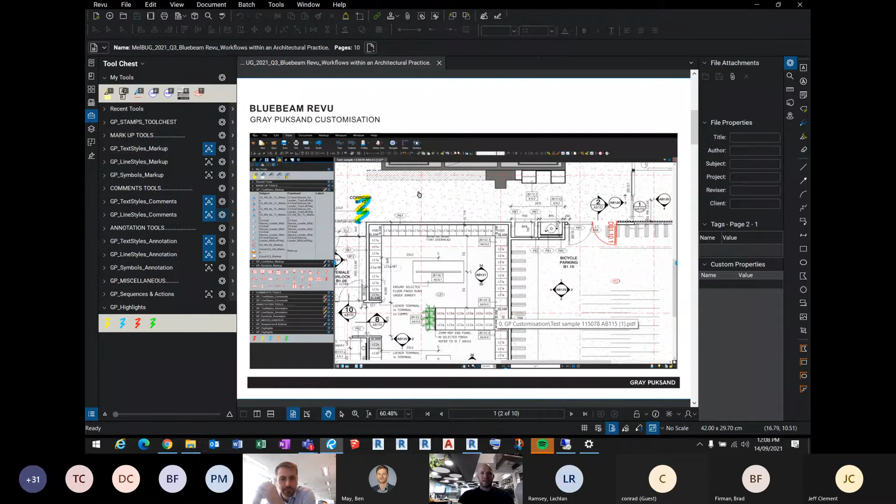So here we might have a particular drawing that's gone out and a project leader may want to mark this up electronically. The ability to mark it up electronically means people can be more agile and more collaborative, and also means less paper needs to be printed, which is better for the environment too. We have a series of markup tools we've created around text styles and symbols as well. So every symbol we've created in Revit has an element in Bluebeam as well.

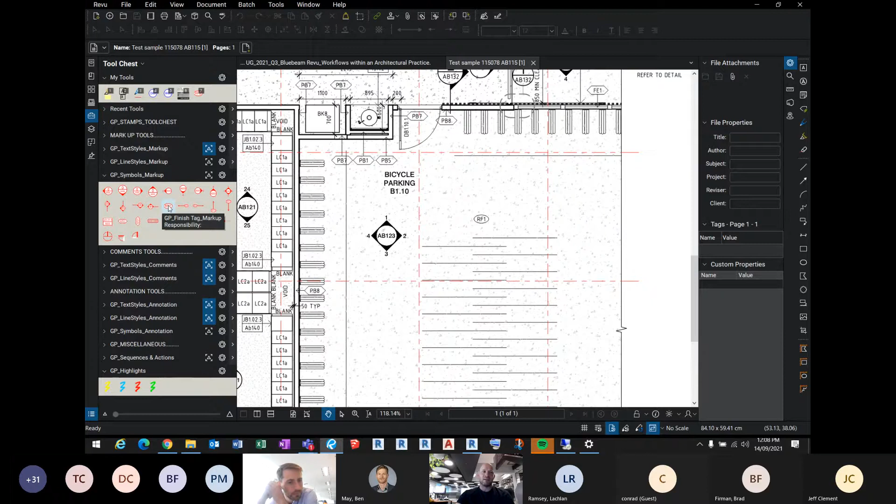So someone can quickly just drag it on and drop it. If a finish isn't quite correct, they can drag it on and mark up the finish they want it to be. So these are all interactive as well.

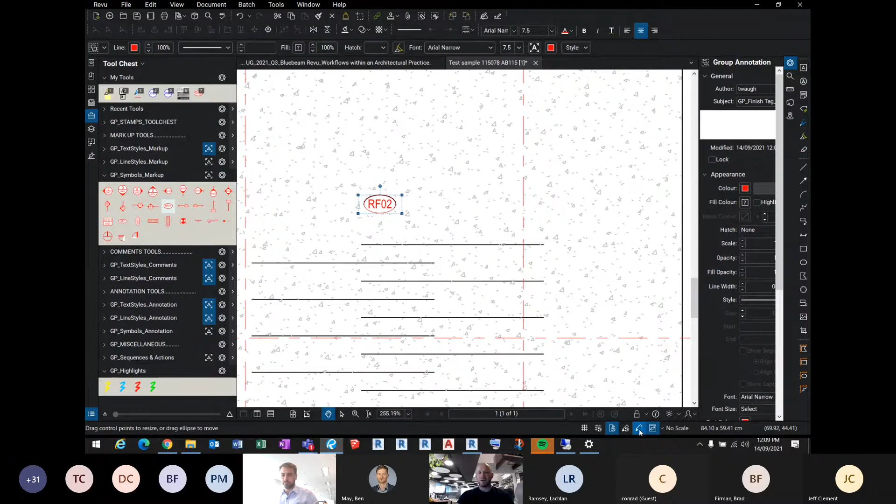In relation to that, if you've got a markup tool you're using quite a bit, there are a couple of ways you can reuse that. The reuse markup tool down here is quite a handy way to reuse a markup, and it lets you move markups around quite easily and repeat them.

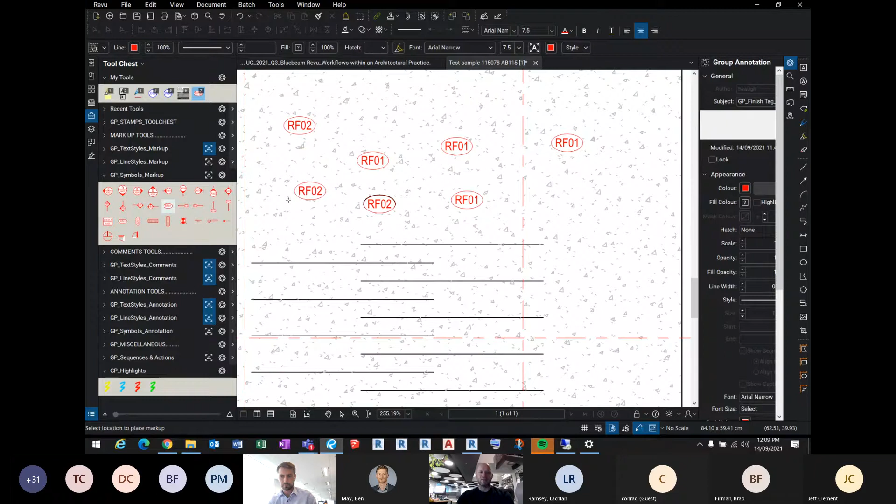You've also got an option up here of adding something to the tool chest. If you right click on an element and add it to the tool chest, you can add that to My Tools. Once you add that to My Tools, it gives you a little number keystroke, so on the keyboard if you just keep repeating 7, that'll allow you to reuse that markup.

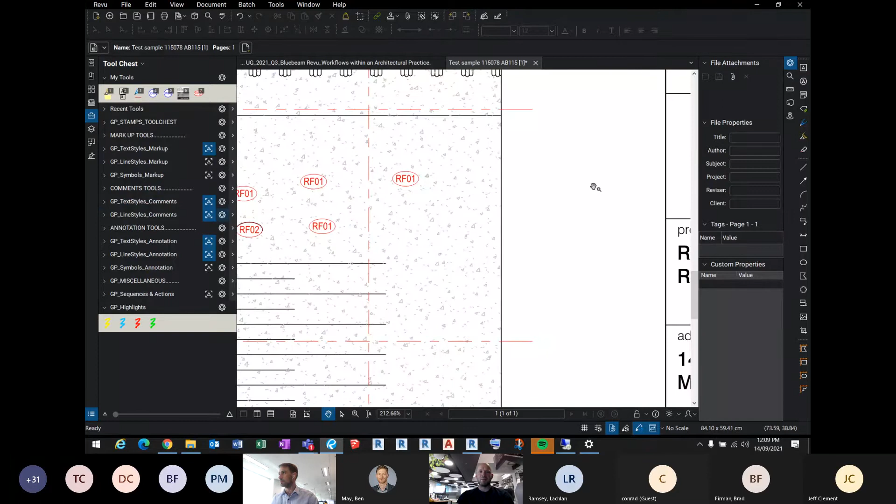We've got a series of options here around text styles, line styles, and symbols. These are all red markups - a red markup is something that definitely goes onto a drawing in the document and needs to complete it. These ones around comments are blue - a blue is more a direction. In the past, if everything was marked up in red, sometimes a direction could end up on a drawing, so we created the workflow that if a text style is blue, it won't go on the drawing - it's more a direction. Then we've got annotation tools where symbols and things are in black as well.

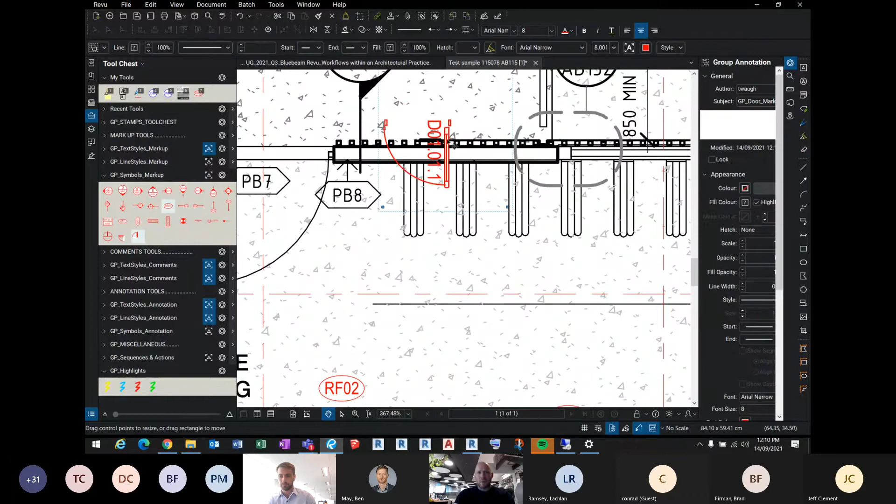We've also created elements around doors, so you can grab doors and drag them on here. We've got a masking element for that door, and then you can flip those doors as well and resize them. So someone like a project leader who's quickly wanting to mark up maybe a double door in this location can quickly put a door there for a markup.

We've also got a lot of things around elevation tags as well. So if someone wants a direction for an elevation tag to be in a certain location, they can show those elevation tags as well.

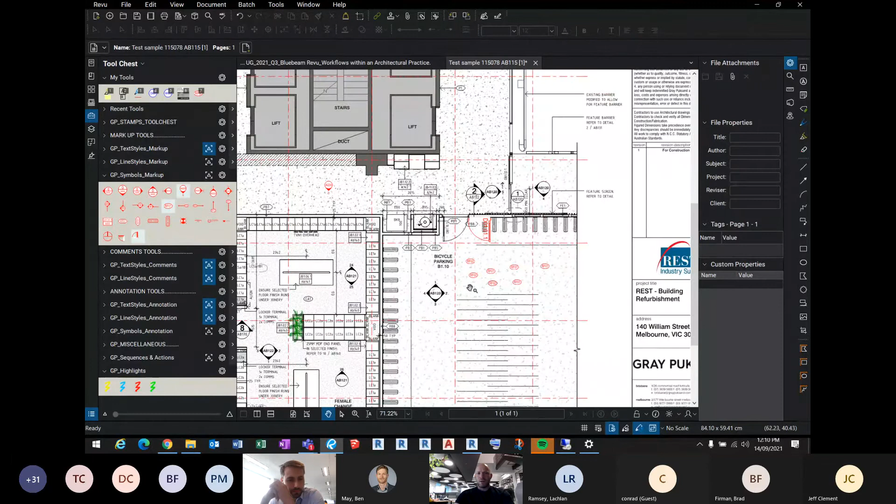The classic markup would usually have a highlighter to show that something's been done. We've got a quick little tool here where you can actually just highlight something's been done. This is quite valuable if someone's sick one day, so people can understand where others are at with those particular markups by going through and marking up those tools.

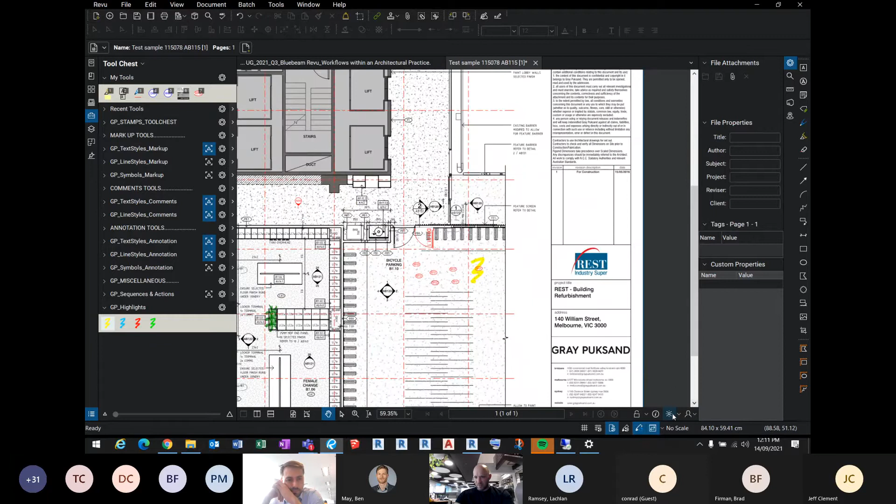Another handy element that people are not always aware of is the dimmer tool. The dimmer tool function basically puts everything in the background that's part of the printed PDF and just shows up the markup tools. It's quite a handy tool to see what's been marked up on a particular drawing set.

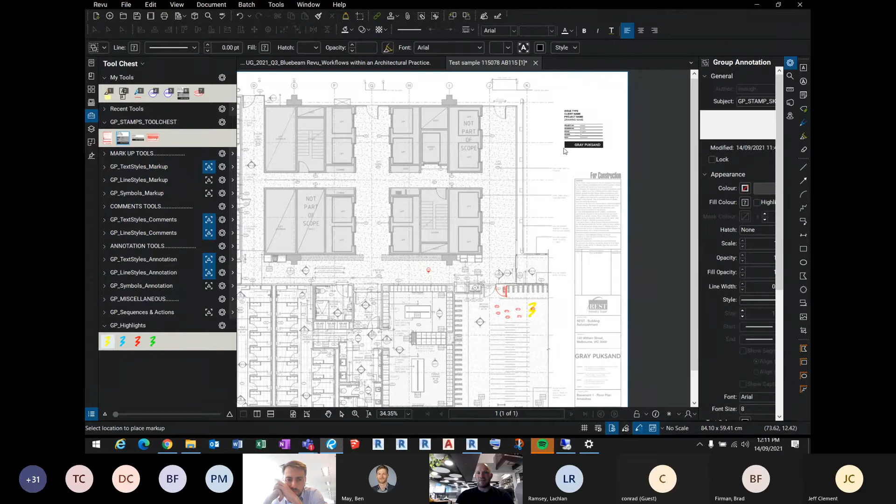We've also got what we refer to as our GP stamps. These are interactive as well. So if you're doing a little sketch, you might just pop in a little title block on a blank sheet, and since these are all interactive, you can describe what they are in relation to full information and start to fill out particular sets of documentation for little sketches.

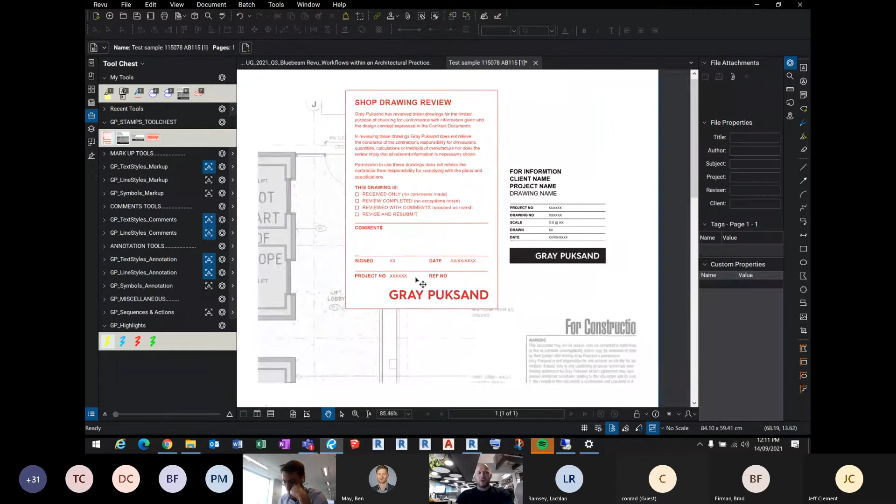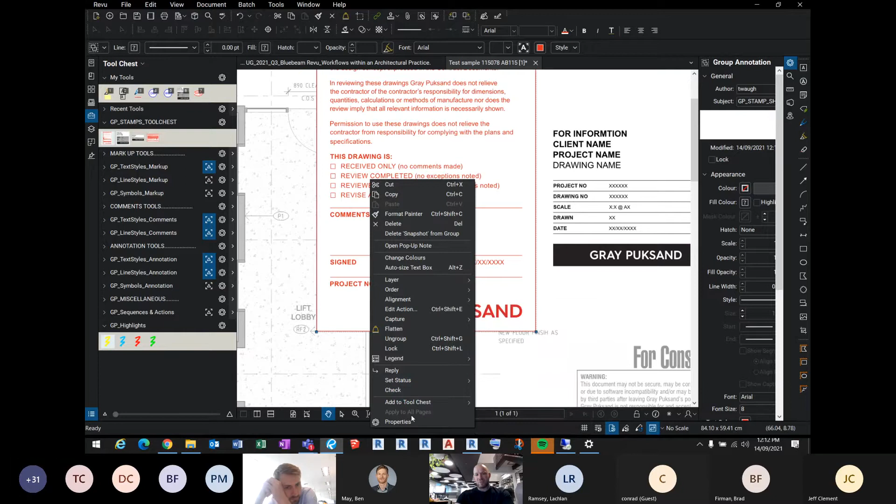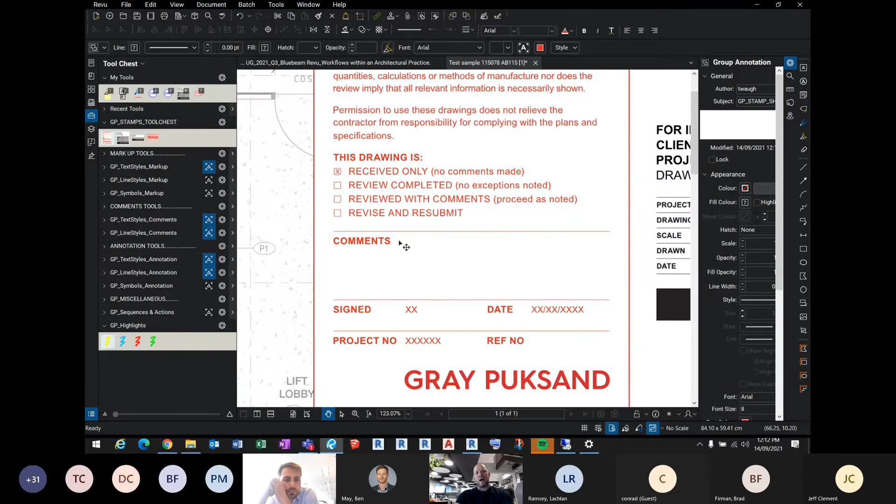We've also got shop drawing stamps as well. So what I recommend to people is to fill out things like the signature and the project number. Then you can also apply it to multiple pages. So if you had multiple sheets, you can quickly apply that to multiple sheets, and then simply click on those sheets. These are interactive, and you can actually start placing the individual sheet markups on those individual sheets.

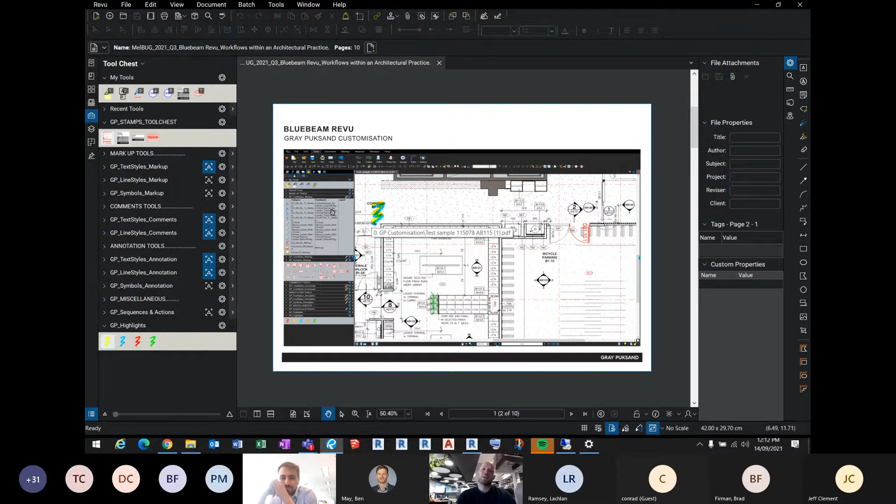So that's really a nice workflow around the tool chest. We spent a lot of time with Chinook, who helped us work through this with the previous distributor, and it's saved a lot of time for our users in relation to markups, being agile, and using less paper.

The next one that we use a lot is Bluebeam Studio. Now, I believe you've gone through a lot of sessions previously on Bluebeam Studio, so I won't go into that. But if you haven't explored it, I recommend you do. It's a really valuable collaborative tool. Reach out to your distributor for that.

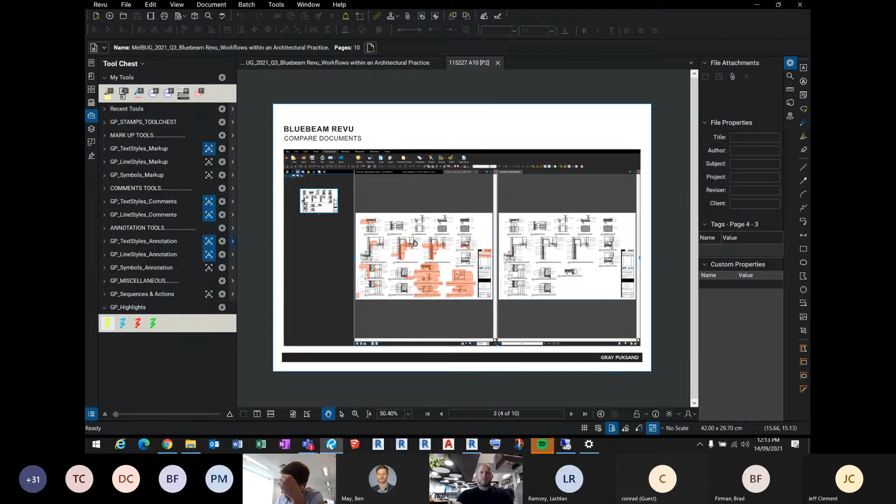Compare documents is quite a handy tool to use. There are a couple of different ways we can compare documents: one is compare, and one is overlay. I'll go through compare documents first. So here we've got a preliminary set of documentation, and we want to see what's changed between preliminary and tender.

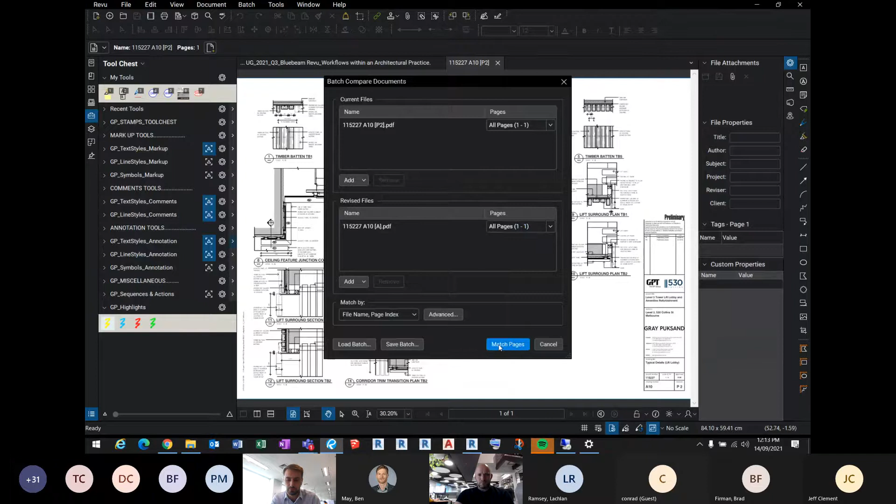So if we go to our batch tools and compare documents, we want to add a document to this. And we want to add another document, so that was the preliminary set, and then we'll add the one which is the tender set. Oh sorry, I went to batch there—I was meant to go to compare documents, this one here, sorry, apologies for that.

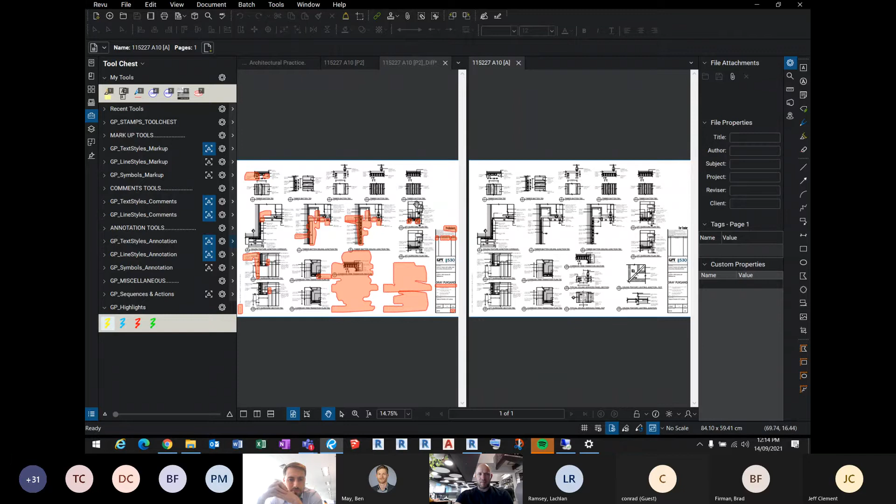And this will create a separate document called diff. You can rename this document if you need to save it in the future. But as you can see, it's bringing them up side by side, and it's showing all the information that's changed—so we've got preliminary, and for tender it's changed.

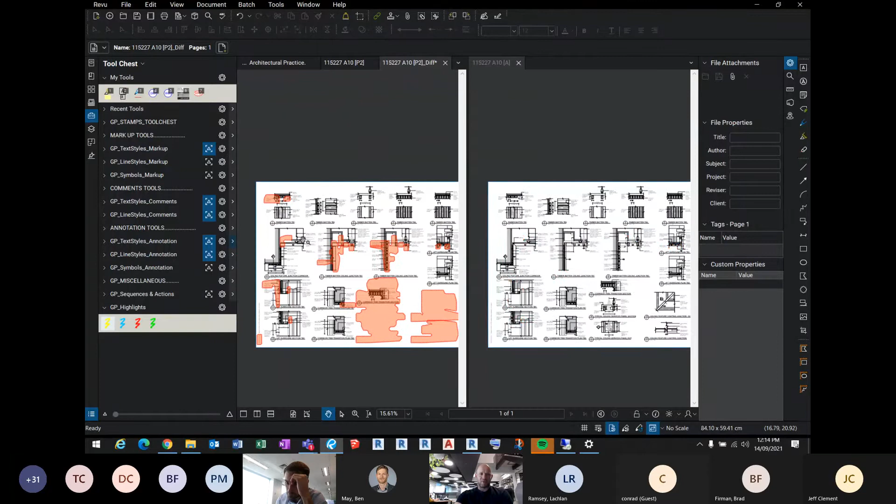We've noticed revisions of changes. As we move forward here, we can see extra detail items have been changed. And as we go up to here, we can see even more detail around the batten size that's changed. Now, this is quite valuable if you needed to send something to a project manager so they can understand what changes have happened quickly and easily, or you might just do it as a project leader to understand what's changed between particular revisions.

Not every one of these clouds is actually going to be required. So if you click on one here, this is just talking about time and date stamps. You can click on the unlock for that one and delete it because it's not relevant.

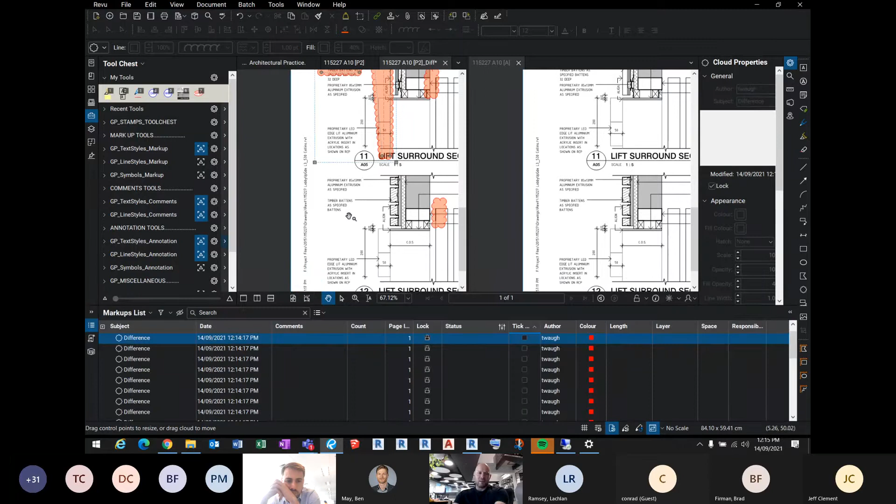You can start looking at adding comments to these as well. So in here, if we unlock this one, we can look at adding a comment about what that change is. So we know that's a batten size change. And then you can see down here, it's adding those comments around the batten size change.

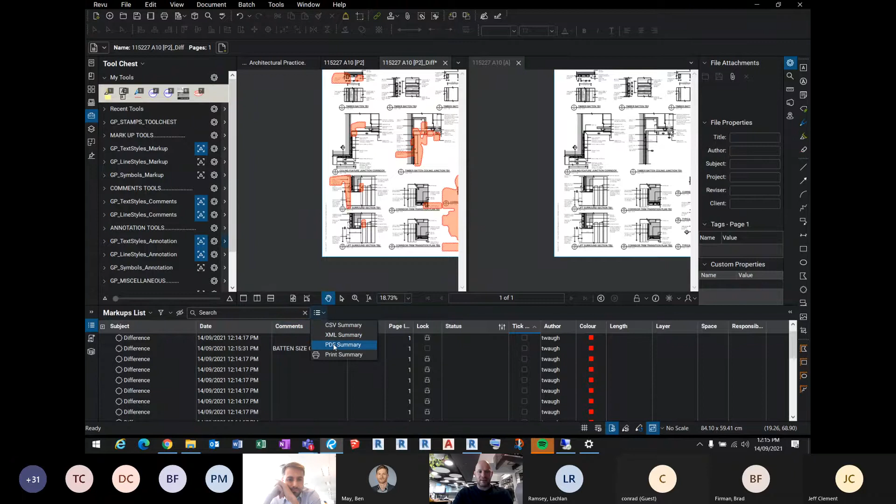Now, the handy thing about this is you can actually create a summary as well. So if the project lead wants to know a summary of changes, this is a quick and easy way to highlight some changes. This will create another document which tables the changes. So it highlights here—I'll just see if I can zoom into that for people. It highlights a little snapshot of it, and then any comments will be directed down the side there.

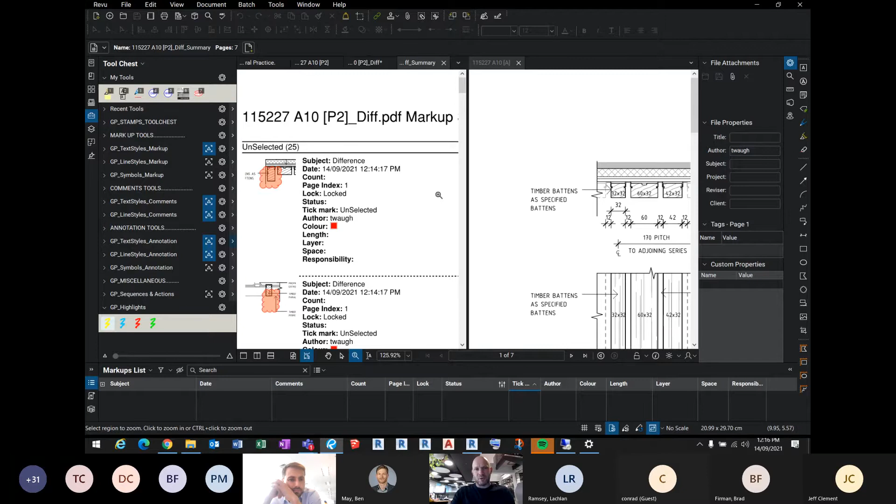So if we go through and look for the one that we changed the comment on, which was the batten change, which is down here, you can see it's literally given us a little snapshot of what that change is, and then we can put in a description of what that change was. So it's a really handy feature to understand some changes.

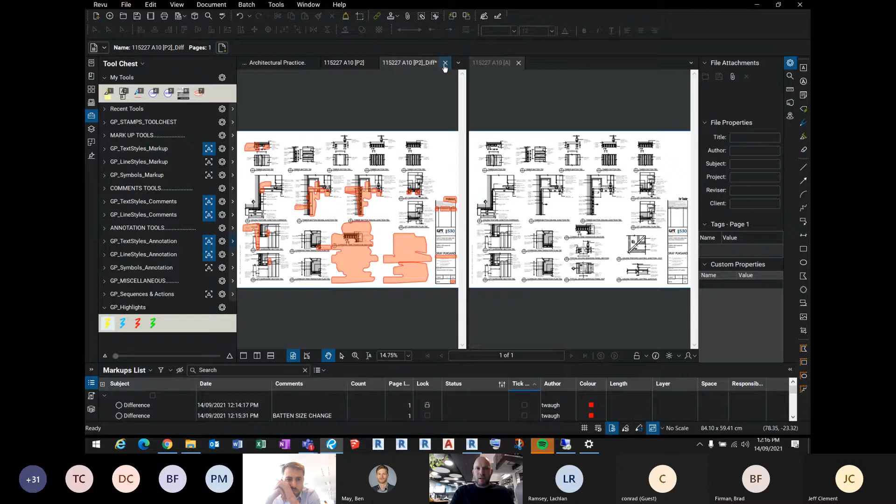The other way to view changes is what's called overlay pages. The overlay pages is more of a graphical representation. So if we go to document and overlay pages this time, it brings up what's automatically open. We can close those and add the ones that we want to review.

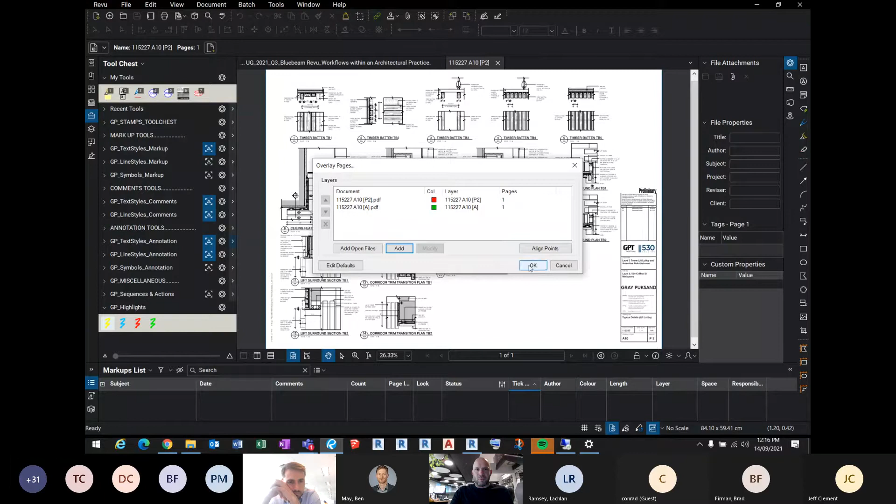Colors can be changed as well, depending on what's required. This is really handy to see what's changed in a graphical representation. If we look back up here, we can see that the green we'd chosen was the tender set, so there's a change to the size of the batten, and here in green there's extra documentation.

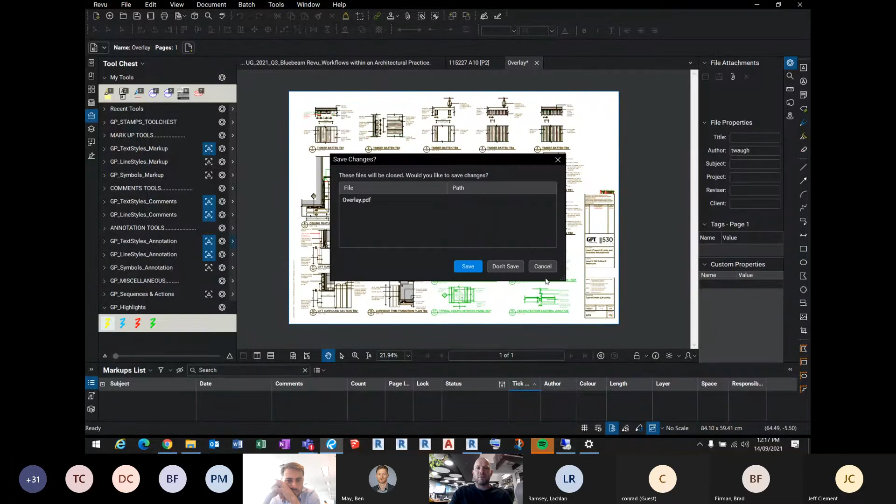This is quite handy for internal reviews, but also for documentation purposes. If we're looking at stairs in this particular case, we had an element of the stair where they hadn't really understood what was happening in this area, because they were looking at the stair in isolation, without the surrounding walls.

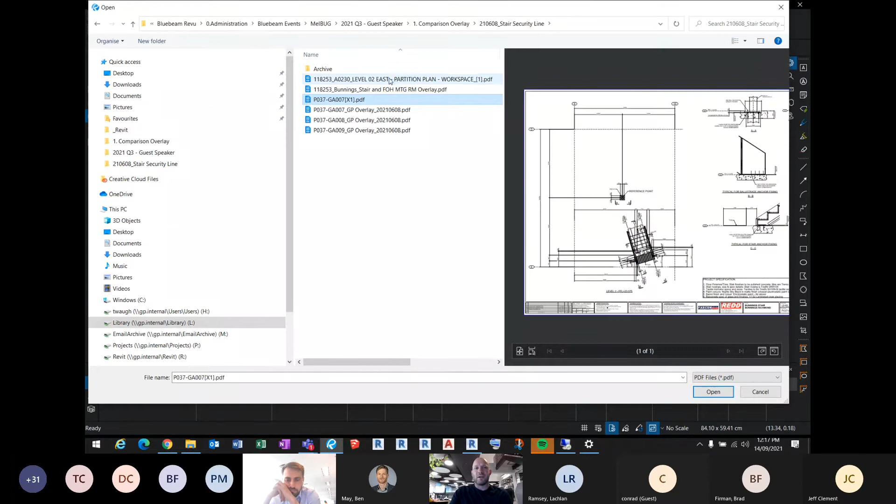So we needed to understand what was going to be the knock-on effect of some of those changes. By doing a little overlay, we could see what needed to be changed.

For overlay pages, you can use what's called align points. If you've got a drawing that's come from a different consultant or a shop drawing, it's not always going to be the same scale, and it's not always going to be in the same location on the page. This is where align points comes in handy.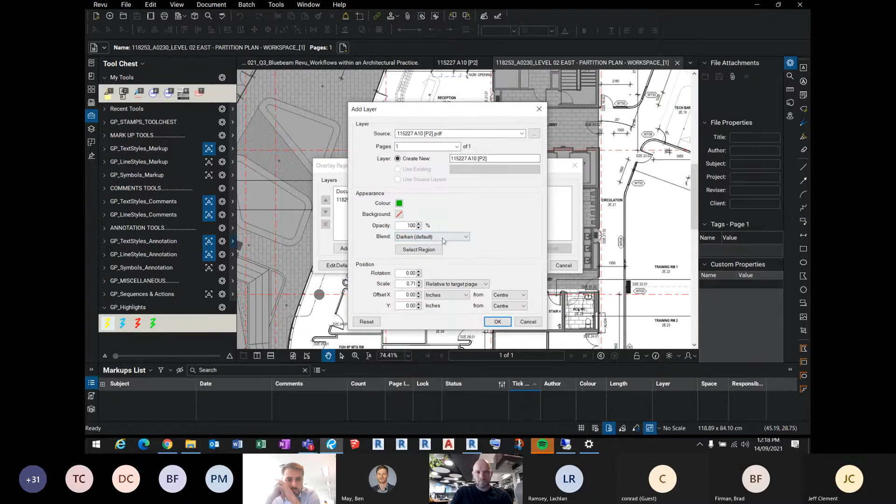With align points, we can choose another layer, and we want to choose that shop drawing. The align points is where we can actually choose something like a grid reference, which will be the same on each of those drawings. It doesn't matter which scale it is, because these three points will actually scale down correctly because we know they're a known dimension.

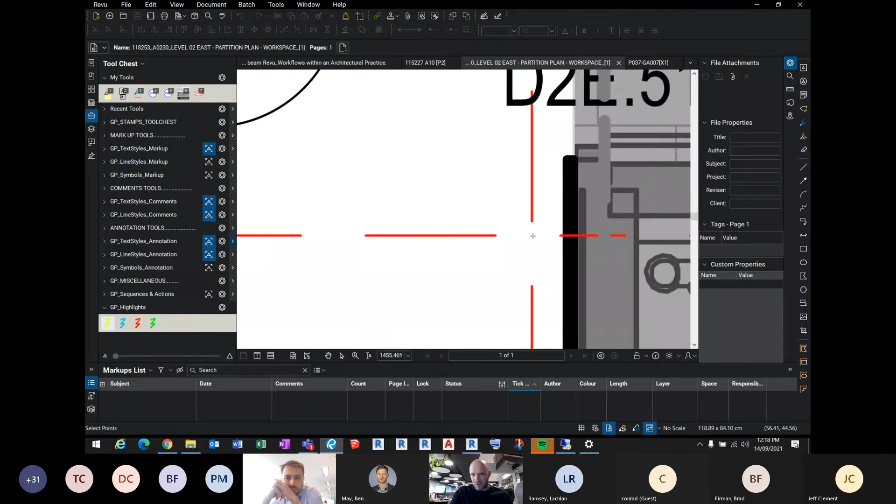So these are the points here from the shop drawing, which are the grid lines. And this will create a separate document which overlays those.

You can see here on this overlay, they'd actually shifted the stair down a little bit and also changed the angle of the stair. That was actually going to cause a clash with our existing walls that we'd created, well, they weren't existing, they hadn't actually been built yet.

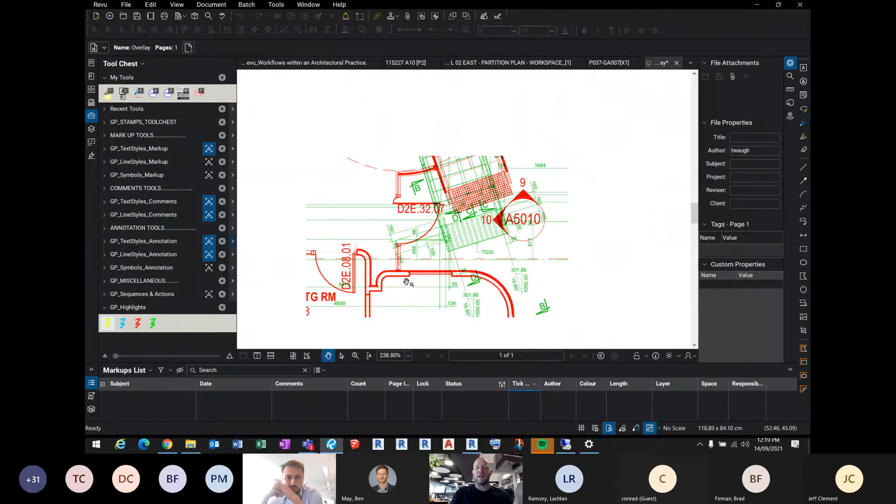But what it allowed us to do is say, well, we might have to look at moving these walls down to allow for this stair to go in that location, if that's the preferred location. You can see here how the overlays worked, where these were different scales. This was quite a large drawing sheet, whereas this was a small drawing sheet. But by using all those grid references, it's actually aligned it quickly and easily.

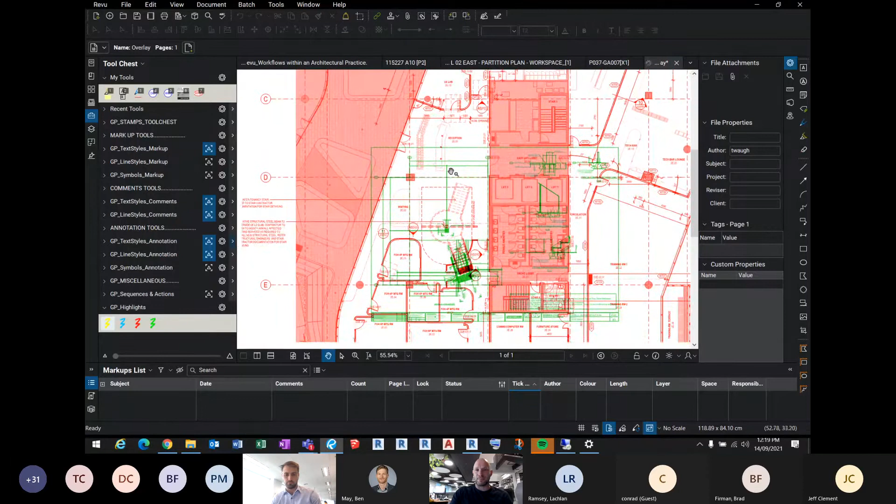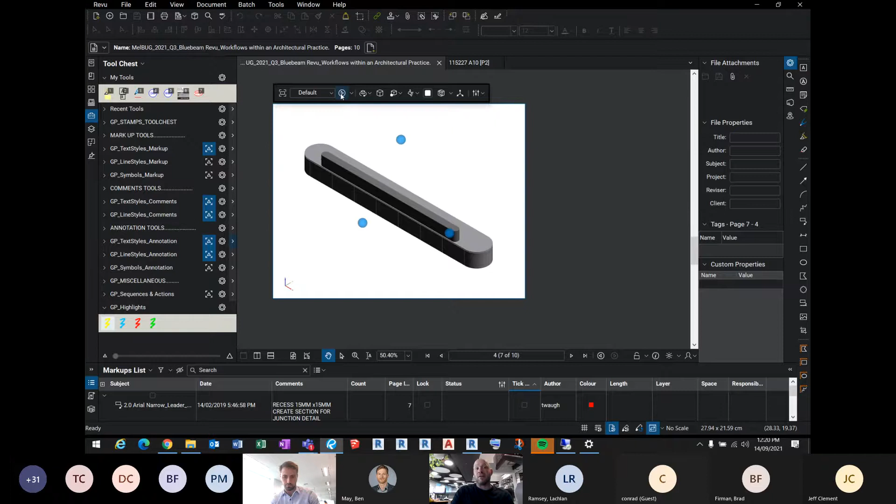Another workflow that's pretty interesting to use is 3D PDFs. If a particular project manager doesn't know how to use Revit or something, they can actually still look at an element in 3D. So here, this is a 3D PDF that's produced through the add-in for Revit and allows you to look at something in three dimensions.

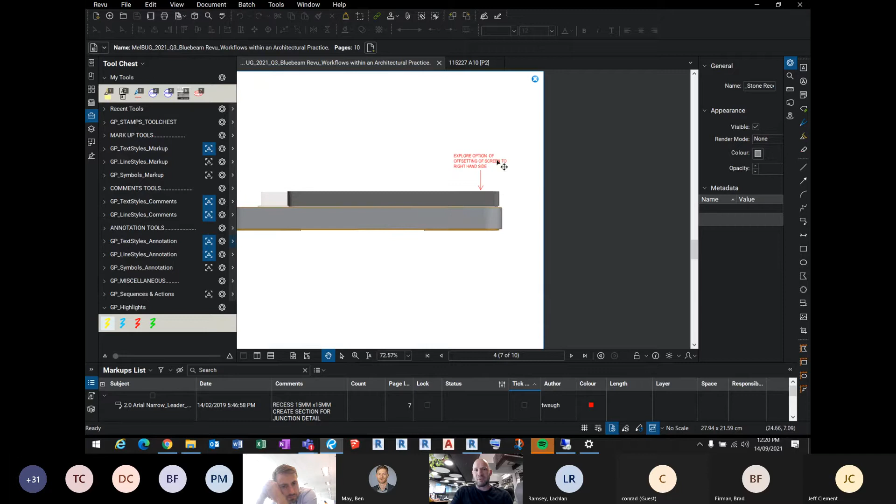It also allows you to look at things like marking up tools and also moving things around. So if we were to explore an option of adjusting this screen to a different location, we can move that, and then we can just add a markup about exploring looking at this screen moving to a different location.

And you can add lots of little details that may need to be added. So they might say, oh, look, let's look at adding a detail around this particular recess and do that as a small scale markup or detail on our drawing set.

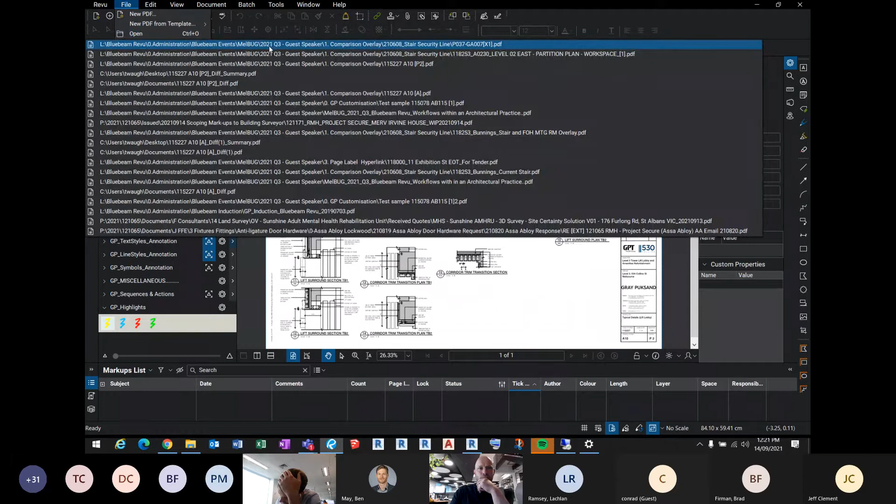I think I'll just go to the next step now, which is talking about page labels. Page labels allows us to quickly and easily navigate through a set of drawings that may not just be ours, but also a consultant set of drawings. The consultant set of drawings may come through as just 1, 2, 3, 4, or our drawings produced straight out of Revit might also do that. So this is where it's quite handy to use the page label feature.

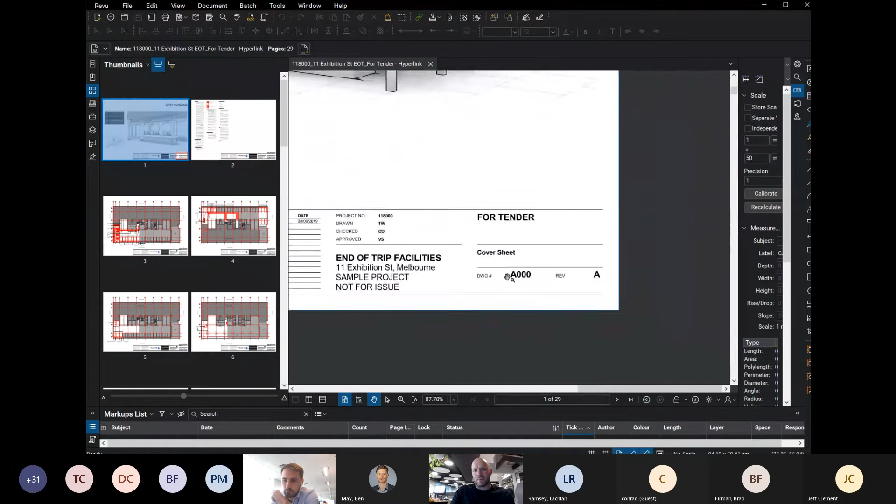So we know that the drawing number is something that we want to reference in this particular case. We go to page labels and we want to select by region, and we just do a little box around the region that we want to select. You can add different elements to this if you wanted to add your project number to your drawing number, for example.

We want the page range to be the complete set. In this case, it's 29 sheets. And you can see down here, this is 1, 2, 3, 4, 5, 6. If we go OK to that, it'll start to populate these so that we can easily navigate what they are by the sheet number.

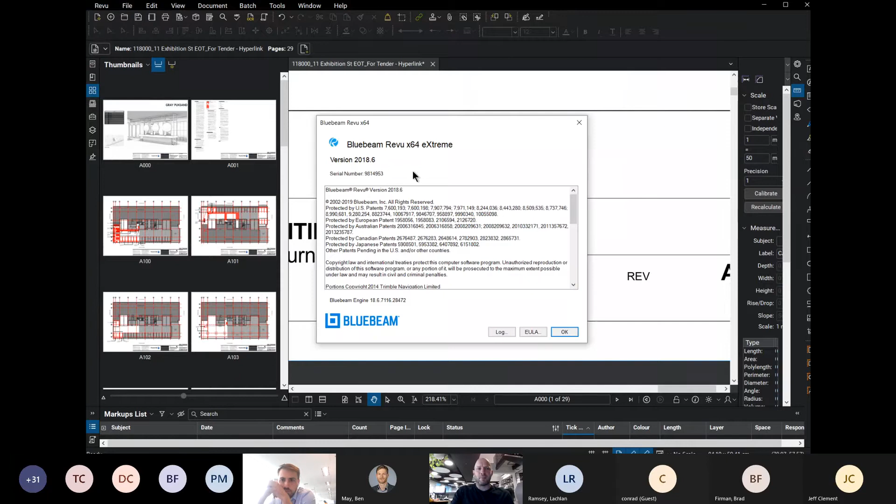The next step to that is what's called batch hyperlinking. With batch hyperlinking, it's only going to be available with an Extreme. We have a couple of versions of Extreme on Hotdesk that allow us to use this feature.

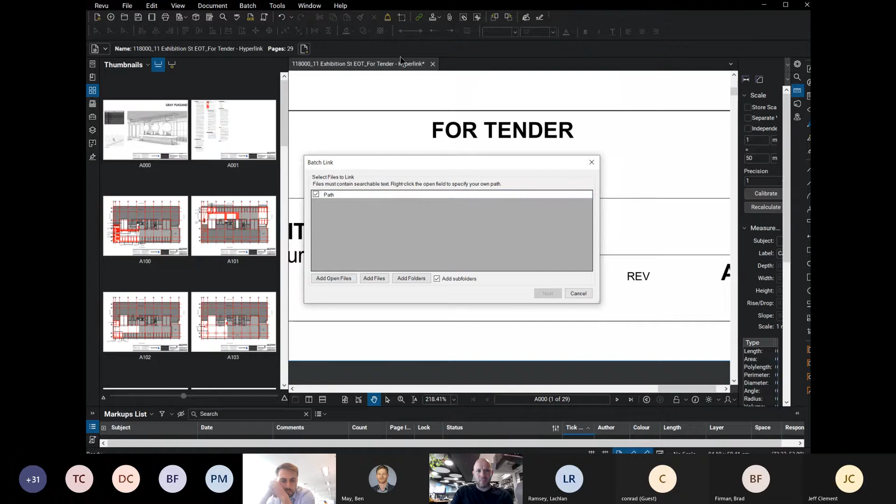So this is where we use the batch linking tool, and we'll go a new batch, and we want to add the open file in this particular case. And we want to start to generate those hyperlinks based on page label.

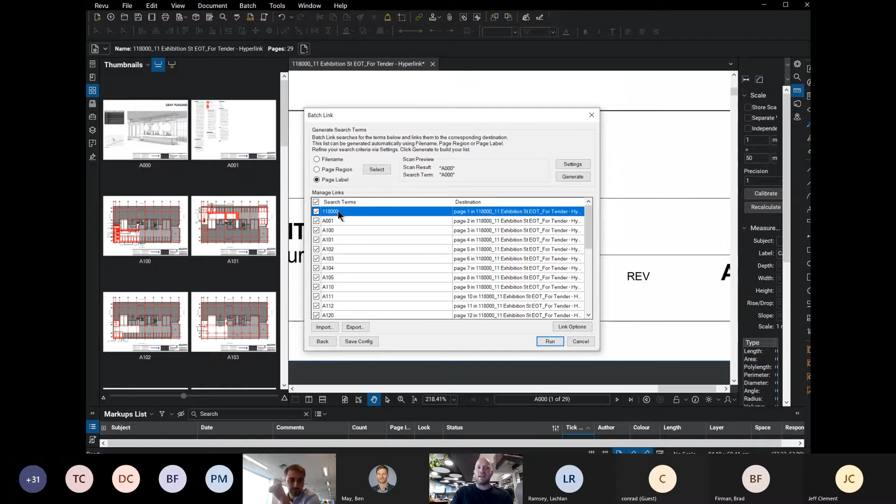One little trick we do also is, because you're never really going to want to link straight to the A000 sheet, what we do is actually use a link that will link the project number back to the A000 sheet. Because the project number is going to be on all the drawings, it'll be a handy link to have to go straight back to the cover page.

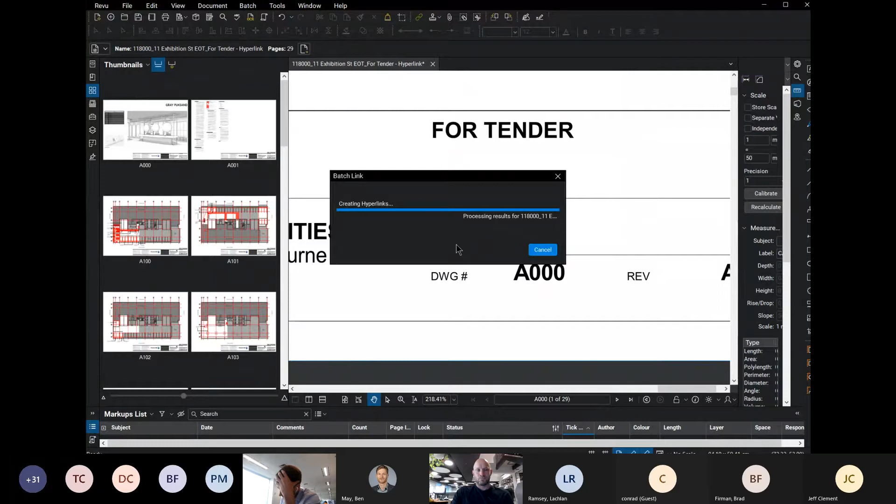That's going to run, and this will tell you how many links it's created. I think in this case it's about 220 individual links across these sheets. If we finish and close,

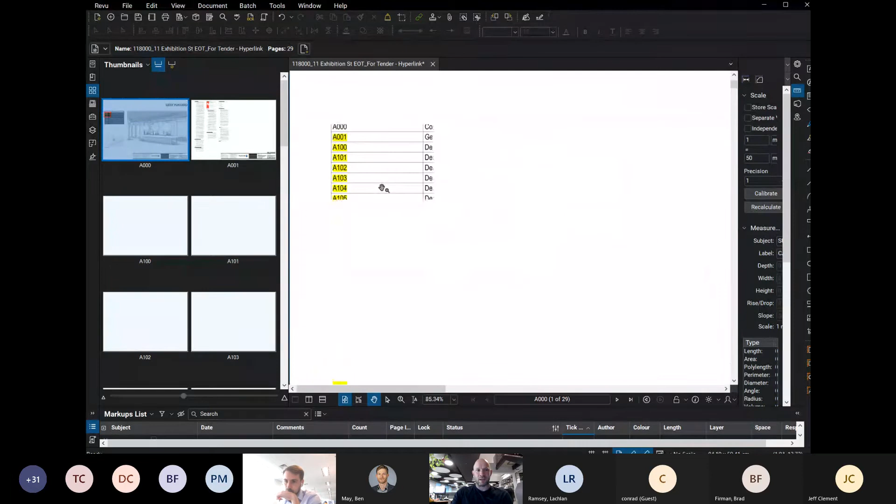we'll just see how these hyperlinks are working. So it's highlighted them all in yellow. So if we wanted to now go to a particular layout, say the A130, which is the amenities sheet, you can see how all these yellow highlights are links that have been created automatically, which allows you to quickly navigate through the different types of drawing sets.

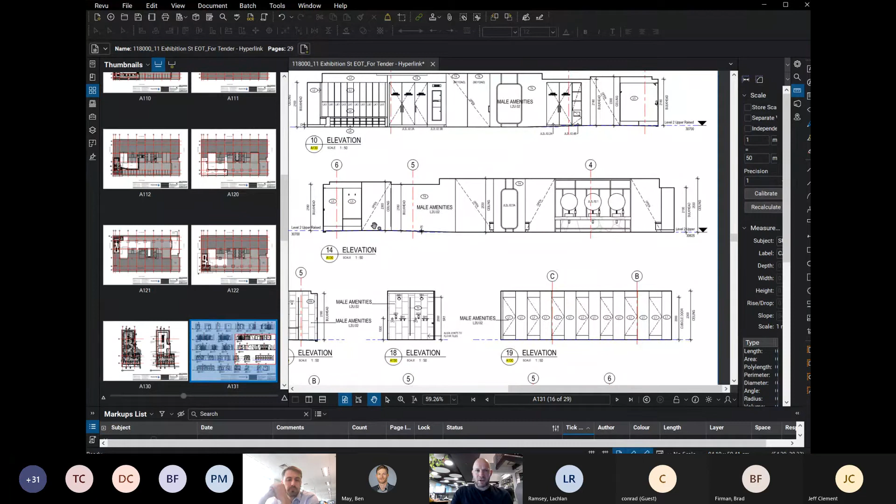So if I wanted to click on this elevation, it'll take me to A131. And then if I wanted to go back to the sheet I was just on, because we've got our referencing correct here, I can just go straight back to A130.

If we want to have a look at, say, a particular joinery item, we can click on that joinery item and go straight to that sheet.

And this is what I was talking about before, where we've got a project number. That project number is on all the sheets. And if we just click on that hyperlink, it'll take us straight back to our cover page.

So you can see how quickly and easily this navigation can happen, not only in internal sets, but also consultant sets where you may not be as familiar with their drawing sheet numbering and where their references go to. It's quite a handy way to navigate quickly through documentation sets.

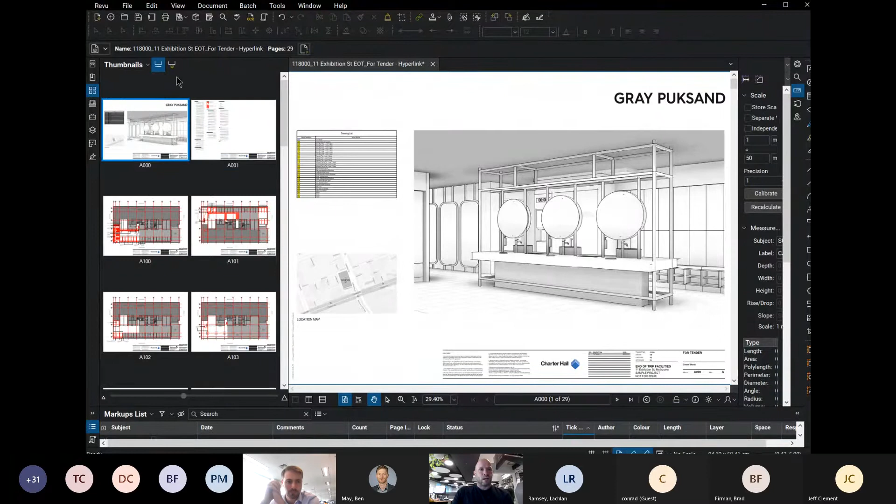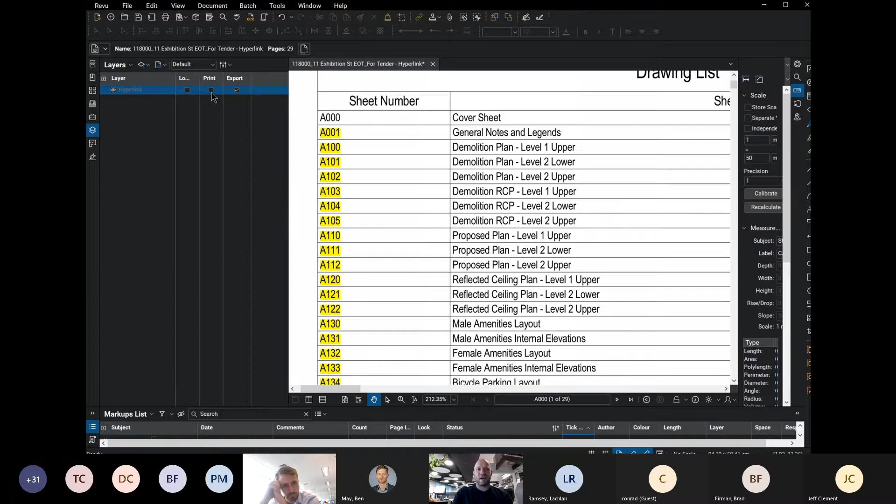You may at some stage not want to have all these hyperlinks showing up in yellow, so you can change them to a hyperlink layer, and then you can turn them off to have them not printed. So as an example, if we were to grab all those hyperlinks that we've created

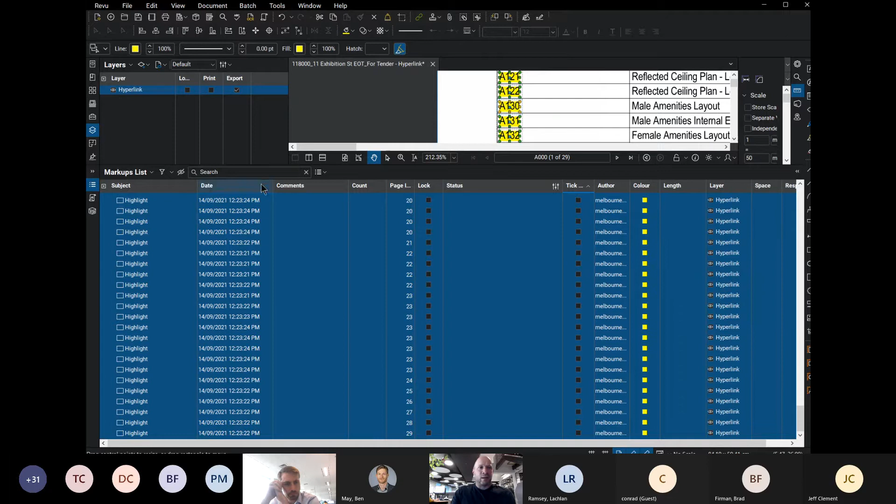and move them all to that layer, which is the hyperlink layer, we can now look at just minimizing this for us. And you can see we can actually just turn all those off if you don't want to see them and have them not print as well.

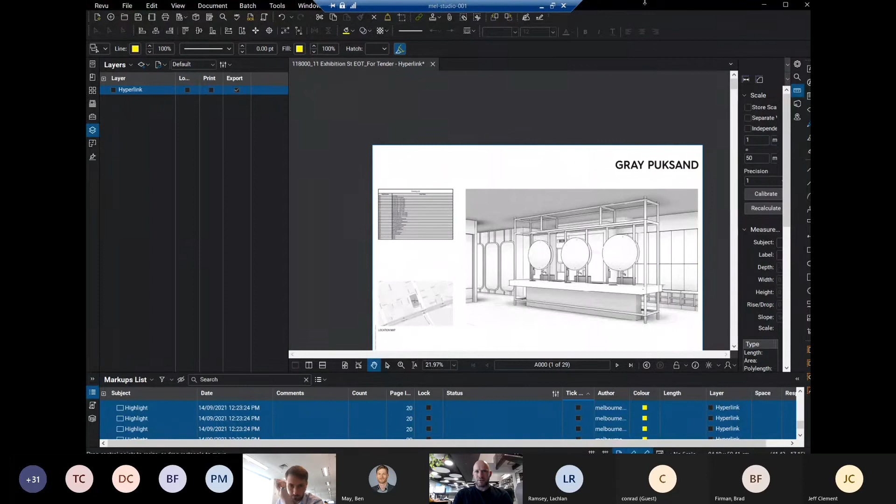So that's basically a lot of workflows that we use here at Gray Puksand. We found it really useful for people to... I'll just see if I can... this one. And I'll just stop presenting now.

Hi, Tim. That was really good, and I think we had a lot of discussion within the chat. Not so many direct questions as much as people actually showing and talking about similar ways that they're using the program. But we've sort of covered so much good content in there.

I was going to just ask a question based off your batch hyperlinking. Is that something you've been doing and sending out to clients when you've got a combined set of drawings, or is it something that you tend to use more for internally navigating around documents?

At this stage, it's always been sort of internal understanding of documents and working through to understand, say, a consultant set of documentation or a larger set of our own documentation, mostly internal at this stage.

But I can see a reason why, if we were to send that sort of information out to people, it would actually help the consultant team navigate a lot quicker. So, yeah, I've often thought it would be a nice thing to run through before you send it out to a client, but get a bit worried about, sometimes we update documents and the hyperlinks go missing.

You have to make sure you go through that process again. But that's correct, yes. Is that something similar, just on the internal external discussion there too? Is the 3D PDF workflow that you run through something you've actually trialed using directly with clients?

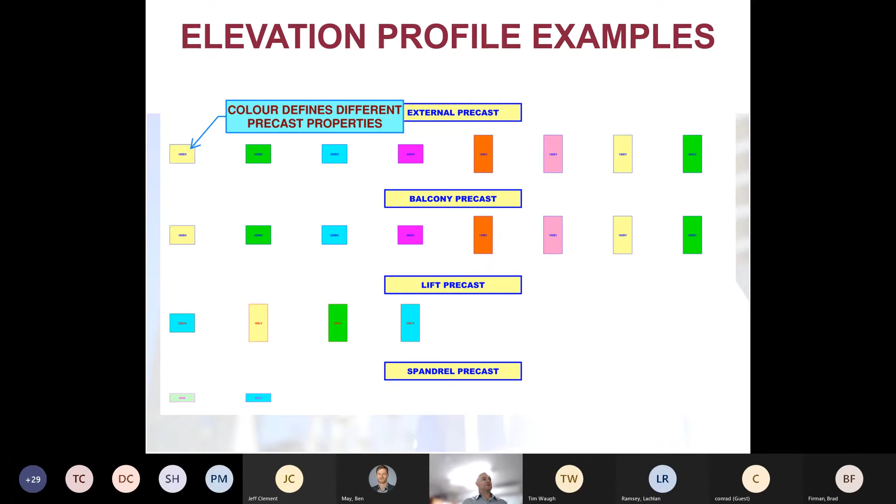Similarly with the elevation, we use the area measurement tool, and we use again different colours to differentiate the precast properties, the labels, and we use the labels and the precast types and the labels.

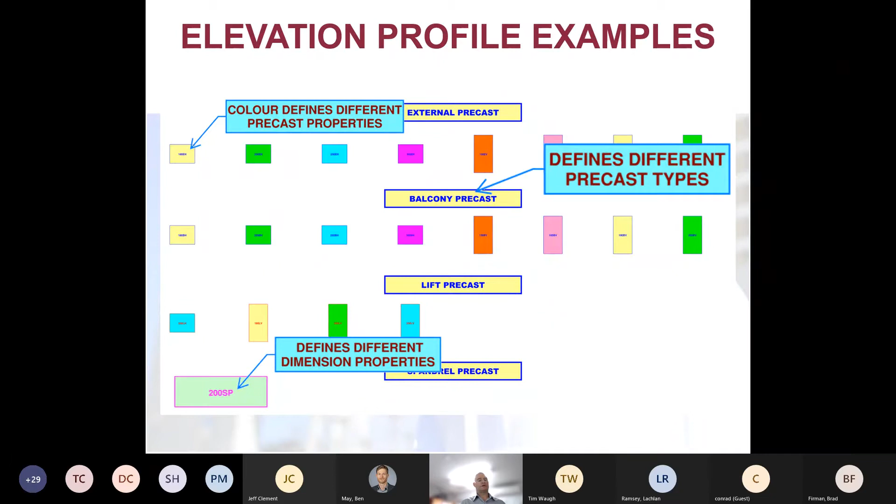Some various types of our tool chest, just some views. As we said, all of our elevation and plan profiles come with individualised tool sets and tools, and then they're all customised to the requirements of the markup.

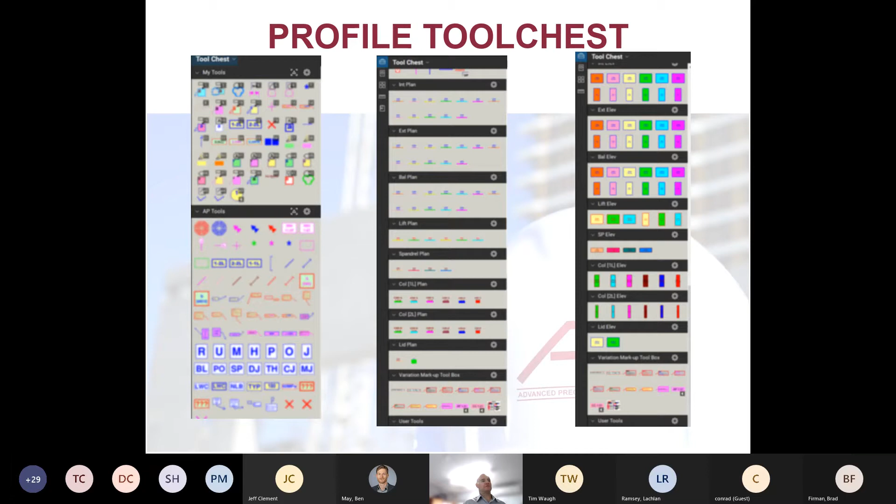We use layers. They're all automated templates, pre-filled out, built-in and custom columns for use in our takeoff as we move down the track. Custom columns, or user-defined columns, are really the lifeblood of our system and allow us to convert a markup into a full-blown takeoff at the end of it.

A little bit more outside the Bluebeam platform than most others use it in general form. We use both built-in and custom columns for different types of markups, and that mix of built-in and custom differs with each of the profiles we use for the various different parameters that we apply to those markups. They're accessed and adjusted via the markups and the properties tab.

For the built-in columns, we use items such as colour, subject, page index and comments. And for the custom columns, we define items such as geometry, precast details, the specific precast requirements, and some of the specific precast items that are built in within those tools.

For each of the custom columns, we use a mix of text, numbers, as well as formula. For example, for calculating the precast weight, we use the precast geometry and multiply it by the concrete density to produce the precast weight. A little bit more detail on what we'd see in our markups list, and then in our properties tab.

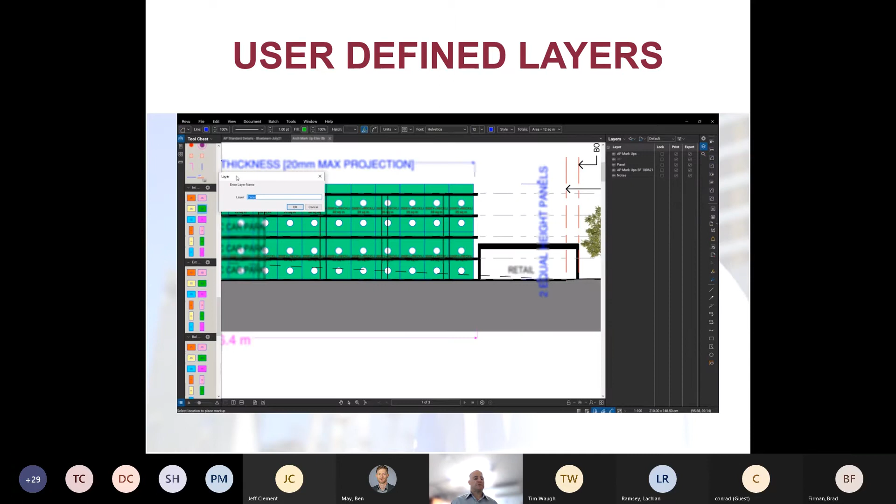We use in our profiles, tool chest, tool sets — they've all got predetermined layers. Again, this allows full flexibility and consistency between the different team members that might mark up something. And just showing one of our tool sets with the layer coming out.

So, plan profile versus elevation profile. The quality of the documentation — so the consultant's documentation — is generally what we mark up on, and the quality of either the elevations or plans will generally determine which set of drawings we're going to use to mark up on.

Marking up in plan profile provides a picture representation of our scope of works in plan. So all of our plans clearly identify what is precast, what's not precast, for costing purposes and contractual purposes.

Everything we've got within the profile, we use tailored tool chests to allow simple methods to choose a predefined precast element. In this case, it's a perimeter tool, taken from the tool set into the markup. We do that in two different ways, and there are pros and cons to either one.

The first is properties mode, which creates a new markup. So when you grab the tool in properties mode, you pull in the markup and you've got the same visual properties of the tool, but it's a new markup you can tailor as needed. The colour, shape and size stay the same, but you can adapt it. Whereas drawing mode creates an exact copy of that tool. A big differentiation there.

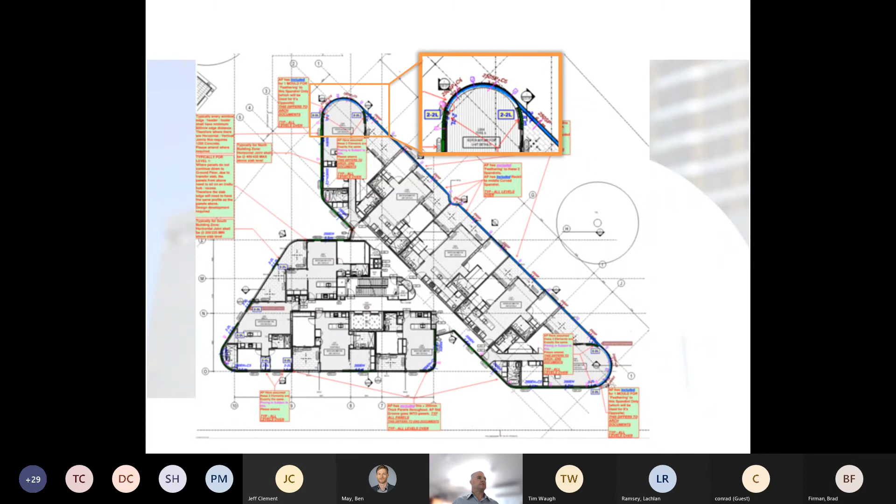Those are some examples of what one of our plan markups would look like, with a bit more detail—colouring, labelling and notes defining our exact scope of works.

Likewise, in elevation, the elevation set of drawings becomes most prevalent for us to define our scope of works contractually to the client. Marking up in the elevation again provides an alternative to the plan—a pictorial representation reflecting our scope of works. When using elevations for markups, specific tool chests allow a simple method to grab and place items onto the markup.

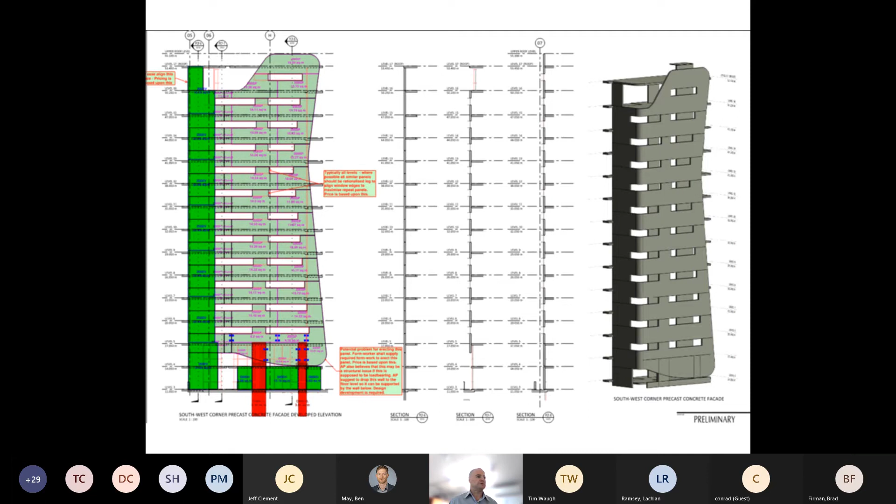Like when marking up on the plan, we use the two different methods—properties mode and drawing mode—even with the area measurement tool, and there are pros and cons for those. That's a visual representation of what our elevations come out like to define our scope. A bit of a blow-up there.

So, exporting our markups. Once we've finished with our plan or elevation markups, we export the data out, grabbing all the information within the markup, and export it into CSV format. We utilise a systemised configuration for exporting the data.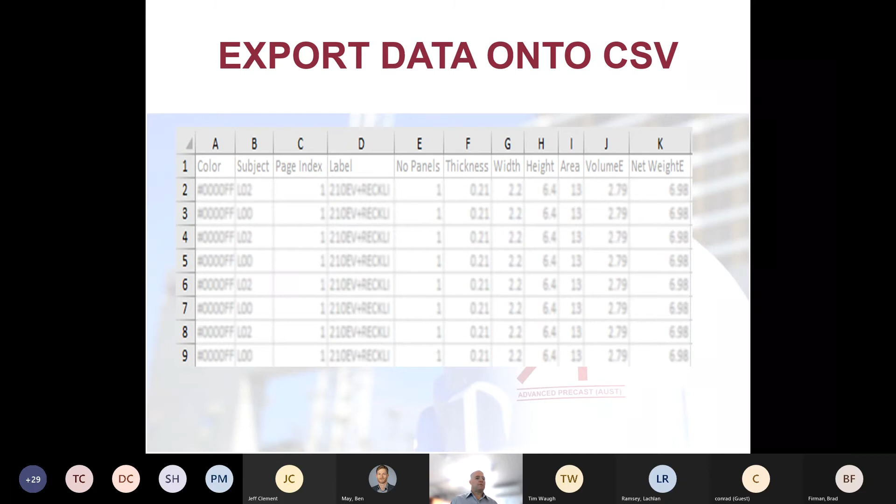We access that via the load configuration pop-up box that appears in your markup summary when you export, and this controls what columns and in what order get exported to our CSV. We then capture that data into the CSV summary—here's a quick look at what that CSV output actually looks like.

Creating our costing takeoff sheet: we export our CSV data from the markup into Excel, which enables the markup data to convert directly into a custom precast costing takeoff sheet.

We use a series of macros to take the CSV and convert it into the formats we require, along with pivot tables and power query techniques, creating meaningful data that can be used for pricing the project.

Utilising these tools allows control over what is and isn't used for pricing purposes. We output specific data onto our takeoff sheet for pricing, quantities, level-by-level counts, and so on.